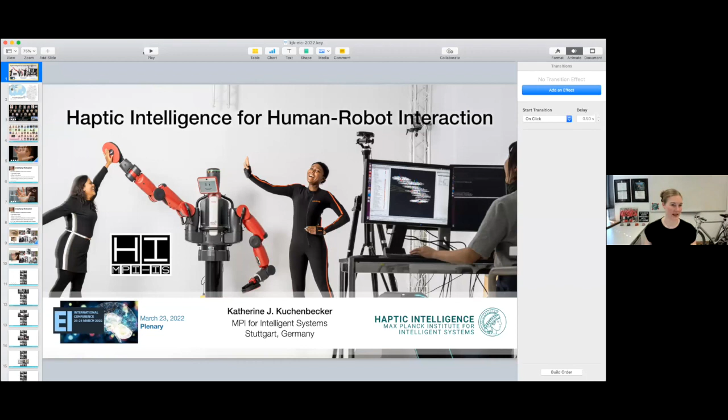Thank you so much, Josie. Let me just get my slides shared and arrange things. Can you hear me and see me and see my slides? Yes, that is perfect, that is great. Oh right, thank you very much. Just what I wanted to hear.

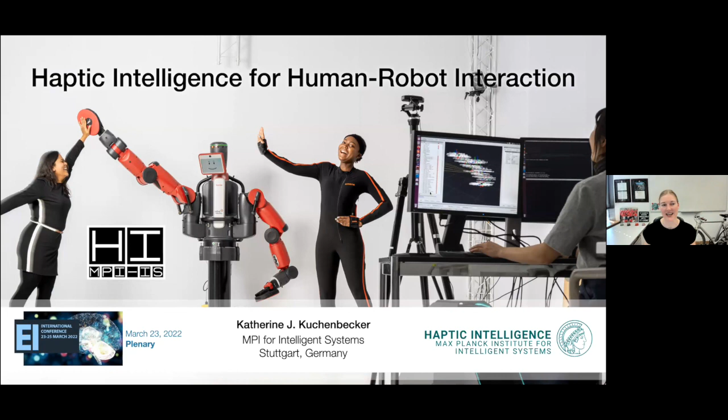Thank you so much, Josie, for that nice summary of this morning's talks. That's really thoughtful and helps us all remember what we saw. My name is Katherine Kuchenbecker. I'm a director here at the Max Planck Institute for Intelligent Systems, and it's my pleasure to give this plenary talk to tell you a bit about research that my team is doing.

I grew up, although my name sounds German, I'm actually American, and I grew up in Los Angeles. I did all my studies, all my degrees in mechanical engineering at Stanford University. And I did a brief postdoc at Johns Hopkins with tomorrow afternoon's plenary speaker, Alison Okamura. So you should definitely go to her talk and all the other plenaries. It's really a delightful set of speakers you put together.

After I did that short postdoc with Alison, I started my faculty career at Penn, at the University of Pennsylvania, as part of the GRASP Lab. I chose to go to Penn because it had this interdisciplinary spirit. It was in the engineering school between mechanical engineering, electrical engineering, computer science, and biomedical engineering. We had lots of connections to neuroscience and psychology, and they really transformed how I thought about research and what it meant to be doing interdisciplinary research in embodied intelligence, in robotics, in AI.

In January of 2017, a little more than 5 years ago, I moved across the Atlantic to the Max Planck Institute for Intelligent Systems. This is a map of Germany. We're here in the southern part of Germany. I work in Stuttgart, and we have another site in Tübingen. Our institute is quite young. We were only founded 11 years ago, and it's a big institution.

We are extremely lucky to get generous taxpayer-funded research money for research in all areas of intelligent systems, which I think overlaps very, very well with the spirit of this conference. Our institute is composed, we have directors at the top—these are like the endowed full professors who stay here for the rest of our career. We have a wonderful set of group leaders who work here for like 5 to 7 to 9 years and then go out and get a professorship somewhere else. Maybe in your field you know some of my colleagues, maybe you know Michael, Moritz, Bernhard, Christoph, or Metin, or some of our group leaders.

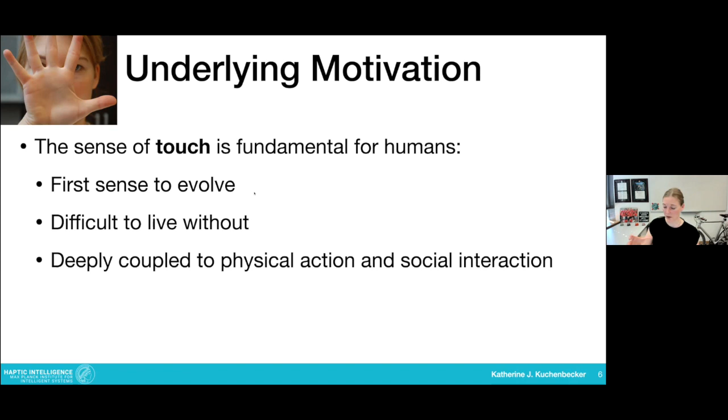So I want to reach out and pick up this glass of water. Touch is involved in how I move my body, how I come into contact with the world, how I stay safe, how I interact with other people, how I feed myself. And it's spread throughout your body. Unlike your eyes and your ears, which are very localized organs of perception, your skin is a huge organ and has many, many different channels.

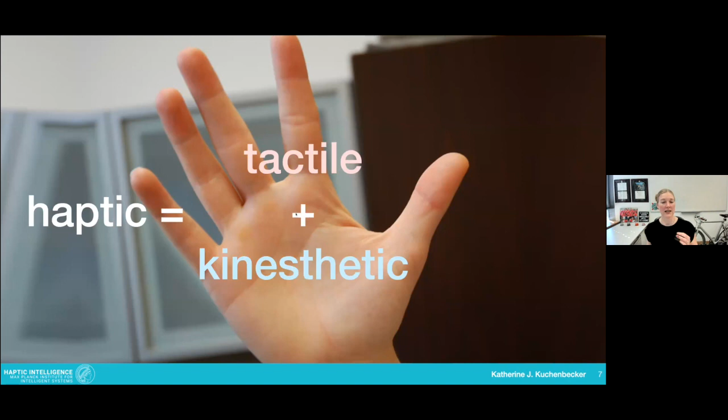So when I talk about your haptic perception capabilities, I usually split it into your tactile system and your kinesthetic system. Some people call tactile cutaneous. This is everything that's actually in your skin, wrapping all around your body at the interface between you and the rest of the world.

And the mechanoreceptors that are embedded in your skin give you the ability to sense where contact is happening, how it's pressing, is it stretching your skin, are things slipping across your skin, is something vibrating against you, is a tool that you're holding vibrating as it hits something, as it cuts, is your skin changing temperature? Is heat being added or removed from your body? And we have a little bit of proximity sensing in terms of the hair follicles on hairy skin.

It's also really important to understand that skin is not uniform. The skin all over your body is adapted to the location. The number of receptors at the tips of your fingers is higher than at the next area of your fingers, and then the other areas on your palms. That's the glabrous skin, which is also very finely tuned. And then the hairy skin has more broader receptive fields, and it's not as densely innervated.

And even among that, different regions of your body have different levels of sensitivity. So there's a lot to know, but that's probably a good start.

Your kinesthetic system, also involved in proprioception, is knowledge of how your body is moving in space. This comes from, you can feel, not consciously but subconsciously, the lengths and velocities of your muscles, the forces in your tendons and ligaments, and the angles of your joint receptors.

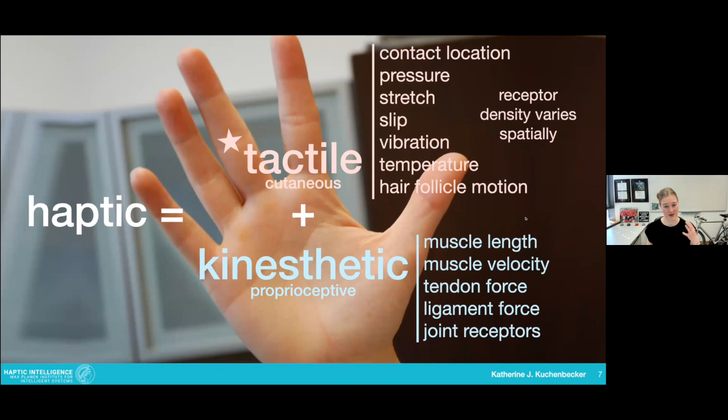And robots, like a robot we design and build, would tend to have more sensors like this, and not so much of these tactile sensors. I think tactile sensation and feedback represents a huge uncapitalized-on opportunity for robotics and general technology. This is what I'm really fascinated in, and hopefully I'll get you excited about it today through my talk.

So if the sense of touch is so important to humans, you might wonder, why then so many engineered systems that we interact with each day basically ignore the user's sense of touch, or the sense of touch of the system? What do I mean by that?

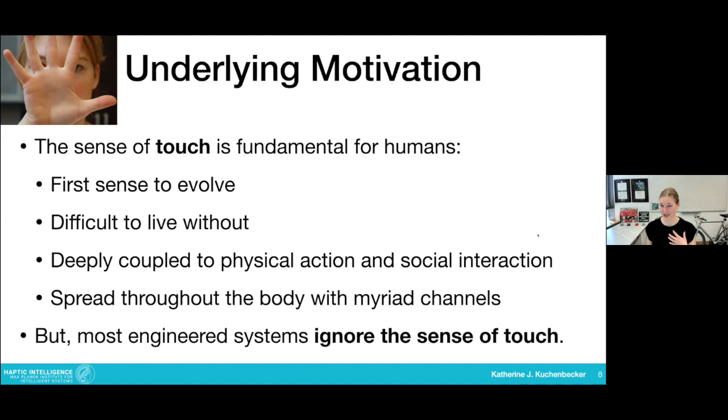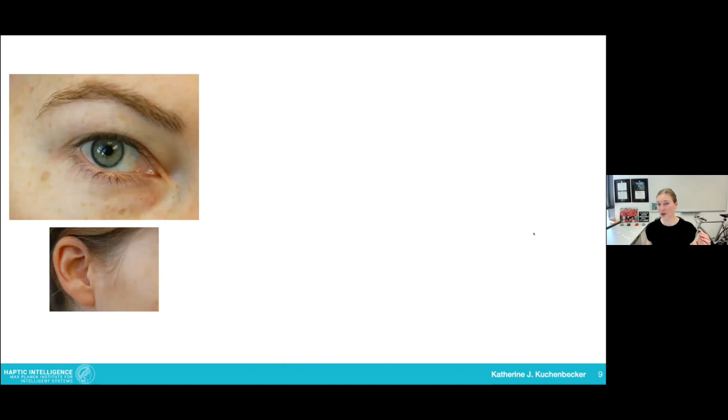I think if computers could draw a picture of what users are like, they have an eye, maybe they have two, probably just one, they see visual stimuli. You can hear things, and maybe there's a hand, or maybe it's just an index finger. My iPhone can feel when I touch it, which is good, but it never presents programmable sensations to me. I pet my cat, Toby, or feel the fabric of something I'm shopping for online, and it always just feels like glass.

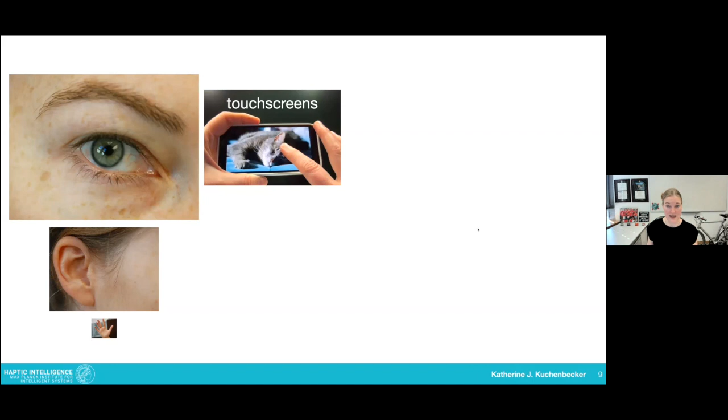We don't have digital display of haptic sensations on screens or in virtual reality. Systems can measure my motion, but they don't present sensations. So those digital virtual interactions that we can have are very different from the physical interactions we have in the world.

This also happens when people are remote controlling robots, say for robotic surgery, which is a topic I've worked on a lot. You can see very well inside the patient. These robots are being used right now around the world to operate, to remove prostates and do other minimally invasive procedures. But the surgeon cannot feel what they're touching. They can only see, and that's very different from manual interaction, from open surgery.

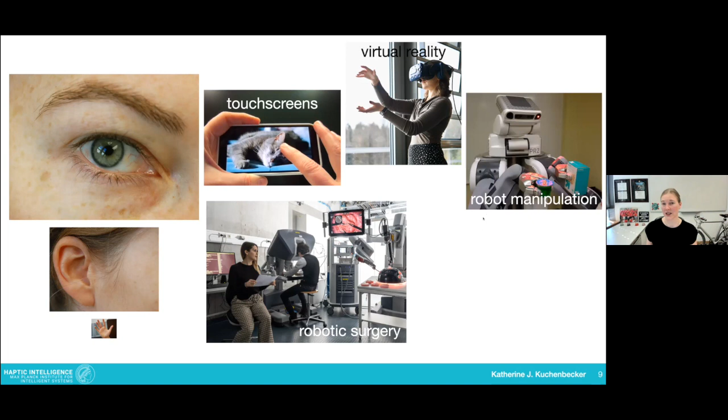And I think it's part of why this technology hasn't delivered on the promises that everyone thought, oh, it's the future, but you can't feel. You should be able to feel in the future. If we then turn to robots more as autonomous agents or semi-autonomous agents, they also lack haptic sensation. I'll talk more about this, even when, and especially when, they're there to interact with people. They're basically numb all over, no sense of touch.

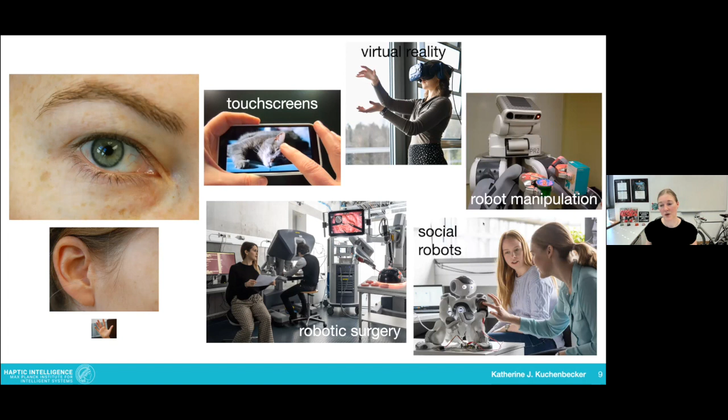People have a really hard time functioning with no sense of touch, but we give our robots almost no sense of touch. So my mission as a researcher these days, I would say it succinctly: to try to bring physical interaction and touch cues more to the forefront in all these different engineered systems, whether that's feedback for humans.

So my team, we work in 5 main fields. There are a lot of overlaps between them, but at the basic level, we're often looking at how fingertips function, what you can feel. The mechanics of soft frictional contact are fascinating. We use some of that knowledge to design and refine and characterize haptic devices, which you'll hear more about in Allison's talk, but are mechatronic systems that create sensations for people to feel, either from a virtual world or from a remote environment when you're controlling a robot.

We work a lot on this: how to add haptic feedback as a user is controlling a robot remotely, how to understand their skill learning over time, how they can train, how they can improve more quickly. Can we automatically assess their skill?

And then now turning more to where robots are an agent, we've also been doing a lot of work in physical human robot interaction. And then at the end, touch sensing, inventing new touch sensors. And it's these last two fields that I wanted to focus on, that I was asked to focus on in this talk today: touch sensing and physical human-robot interaction.

And I find there's a really virtuous cycle between these two, because if we can come up with new touch sensors—there are very few good touch sensors in the world, we need more—but if we can come up with new approaches to touch sensing, then we can create new ways for humans and robots to interact together. And also on our needs side, or maybe there's some kind of interaction we want to create, we can come back to the sensor engineers and say, we need different kinds of tactile sensors than have been invented so far or than are available. And maybe we can create something that's more like this, and that can let us do what we want.

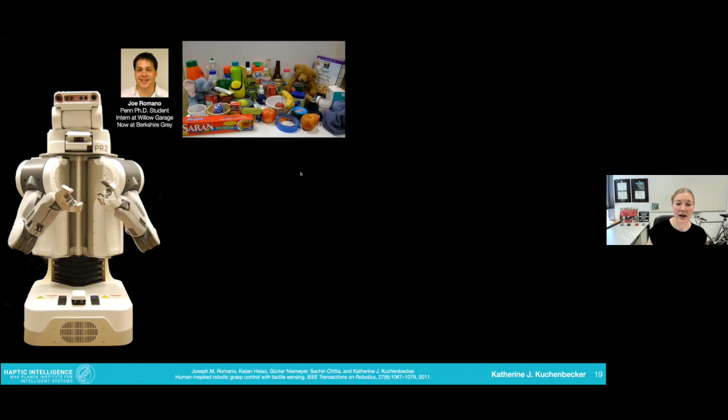And we took a lot of inspiration from neuroscience. This is a beautiful paper, probably my favorite paper, by Johansson and Flanagan, about the beautiful coordination of how the tactile receptors and fingers coordinate as you close and you feel contact, and then you lift.

And then if something bumps you, how you react, or if you're setting it down, you don't move the glass right to the surface of the table and let go. You move down till you feel the contact, and then you let go at that moment.

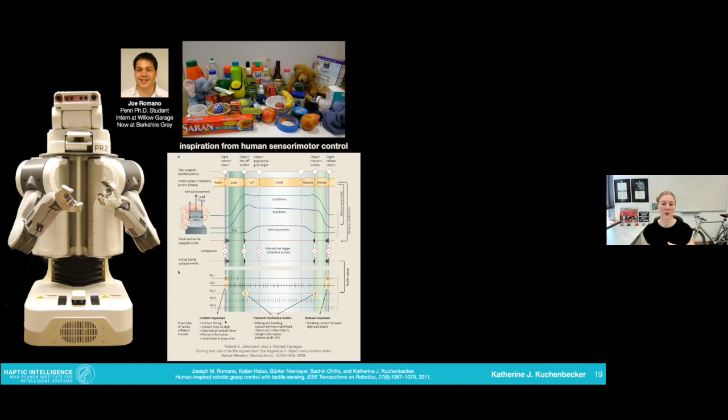And so we tried to endow the PR2 with similar kinds of event-based signals, and steady-state signals, just based on its very, very rudimentary tactile sensors, which were just a very low-res 5x3 grid of pressure cells, which were very hysteretic and low sampling rate, like 24 hertz, if I remember, plus an accelerometer. And that accelerometer was really important because it's like a shock sensor—it's a high bandwidth vibration sensor.

So that would let us feel, if I'm holding an object and I'm moving it down, you can feel a transient when the object hits the table. Or in the pressure sensors, we could look at the high pass filtered version of the pressure signal and know that something had slipped and the robot should hold on tighter. Or if we're handing the object over, something had slipped, it's time to let go.

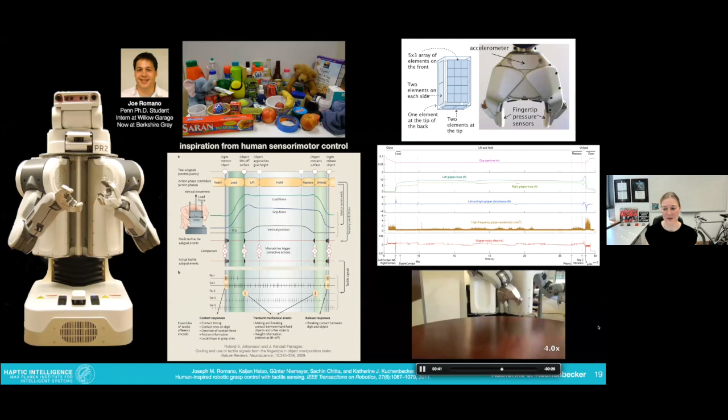And we found, even though the sensors were quite rudimentary, we could do a lot. This is a video of picking up and setting back down some objects where the robot doesn't know what they are.

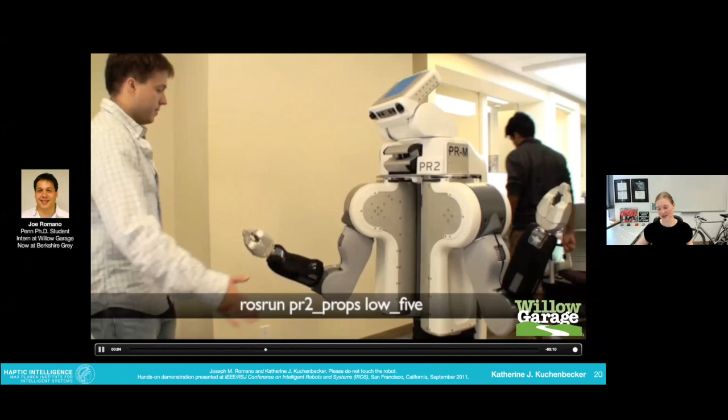We also used this capability, the accelerometer, for high fives and fist bumps, which is lots of fun, but basically the robot's just moving through a trajectory and waiting till it feels the contact. I won't talk about this more today, because today is not about accelerometers, but about tactile sensing.

So then we'd done that project with the PR2, and we wanted to do more. I was working with Trevor Darrell on a DARPA project where we had to teach the robot perceptually grounded haptic adjectives. We wanted the robot to be able to touch things and not just pick it up and set it down, but to be able to feel it and describe it in words like a person would.

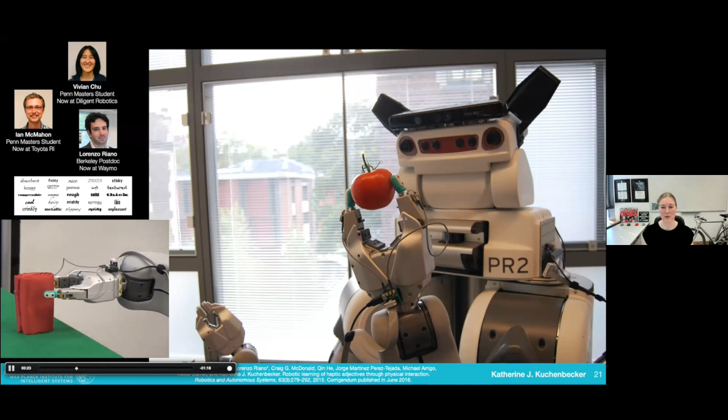So we endowed our robot with these biotacs, which were and still are amazing tactile sensors that were developed from Jerry Loeb's lab in USC for prosthetic hands, but have also been used a lot for robotics.

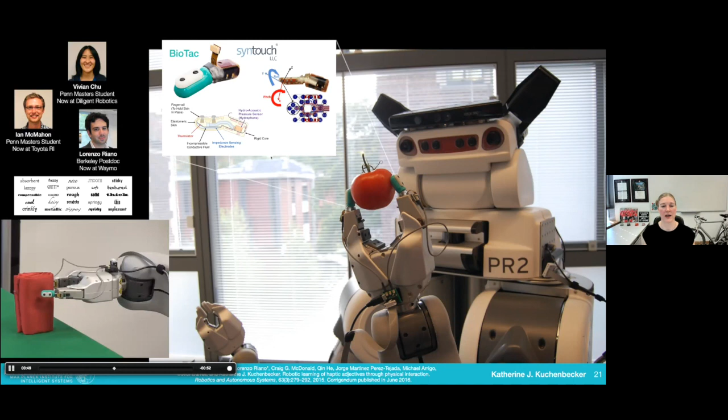They basically have a saline-filled fluid chamber surrounded by rubber and electrodes that are doing impedance measurements, spatial impedance measurements, plus a hydrophone, which is like an accelerometer, and a pressure sensor, and some temperature sensing. So we had all of a sudden multimodal tactile sensing, which was really exciting.

But unfortunately, there were some shortcomings. We used them for a ton. I love these sensors, but it's actually pretty hard to interpret these 19 electrodes. They don't have a physical interpretation. It's not really shape, it's an impedance.

And it's a compact form, but it only has a sensitive area on the outside. If you touch the robot finger on the back, it feels nothing. And they're really delicate. This ribbon cable broke so many times, and these sensors are expensive. They're like $10,000 or $15,000 each.

We broke a lot of them, and they're quite difficult to integrate into a platform. So we had to run the little boards and the wires all down the robot arm. So it was great for research, but not practical for many other applications.

And also, this approach for fingertip tactile sensing is clearly not going to work for the whole rest of the robot. So this project showed me enough that I was really fascinated by tactile sensing and what you can pull out of tactile signals, but that we need better tactile sensors for robots, and that doing that would enable robots to become more intelligent and more capable in their interactions with people.

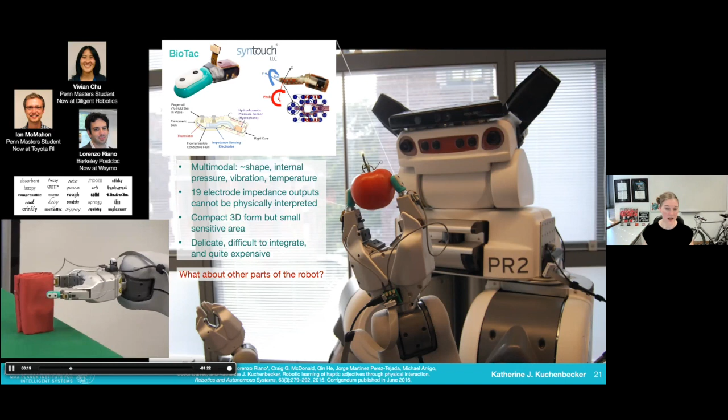So that is what I'm talking about in this touch sensing to physical human robot interaction cycle. And after all these years of working with lots of different sensors and robots and applications, I can tell you what my wish list would be for tactile sensors.

My ideal tactile sensor, first of all, it would be soft. And soft is important for cushioning contact and also for allowing a load to be transferred, torsional or frictional load. It's really hard to control rigid contact. So softness is going to be really important.

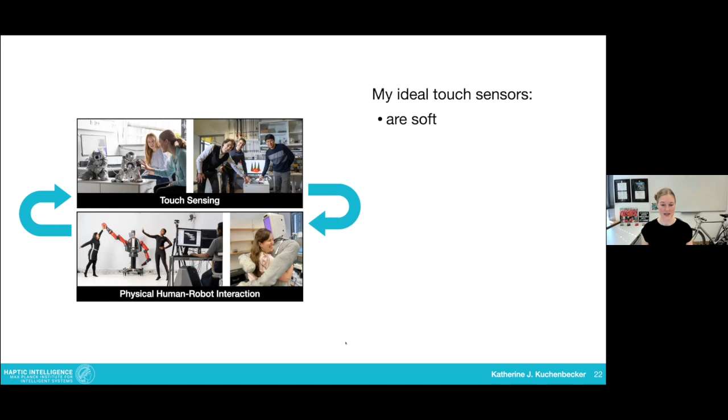I want to cover my whole robot. I don't want just tiny little pressure sensors, where something has to hit me right there, because that's never going to happen. There can't be dead zones, there can't be blind spots. The whole robot, or almost the whole robot, needs to be covered and tactile sensitive.

I need, especially, and this is often difficult, to tell the difference between no contact and contact, the start of contact, when something happens, because that means the contact state between the robot has changed. It needs to do something different. Either it's trying to form that contact or it's not, but it needs to know something new has happened.

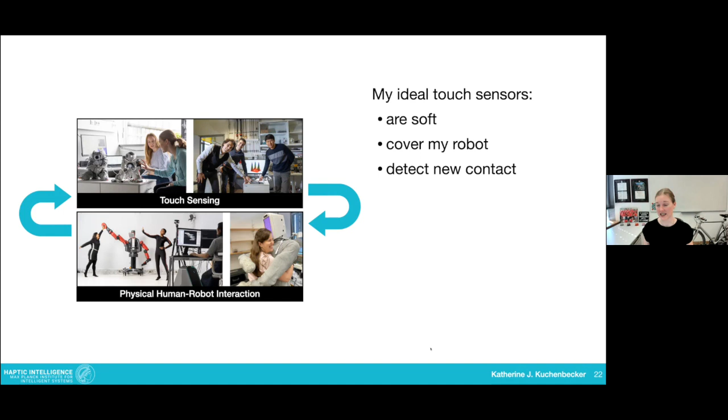So I want it to be sensitive, but I also want it to have high dynamic range. I don't want to clip those signals. I want to keep responding as the pressure gets higher and higher. So I want it to be nonlinear in its response.

I want it to be fast. Time delays are going to be no good. It has to be quick so that I can compensate for what's happening and react, whether it's a high five or something I'm crashing into or something that's falling. We need to respond quickly.

It needs to provide useful information. And this is kind of obvious, but what is useful really depends on the task, the part of the body, what you're trying to do with that robot. And I think too often we think of touch sensing as similar to our eyes.

We want a detailed, high resolution pressure sensor to press into shapes and identify what they are, and that's often not what we want. Maybe I do need that detailed pressure distribution shape, maybe I need shear, maybe I need slip, maybe I need just contact. It depends on the application, what is going to be useful, which part of the sense of touch we should be focusing on.

We absolutely need sensors that are robust and reliable. Robots are going to crash. We need a lot of repetitions, especially for learning-based methods. They're going to hit things, our sensors are going to break, they need to be pretty robust. Softness also helps there. They need to be reliable, so even if it's not going to physically break, the computational connection or the wiring has to be rock solid, and that's a very difficult engineering challenge.

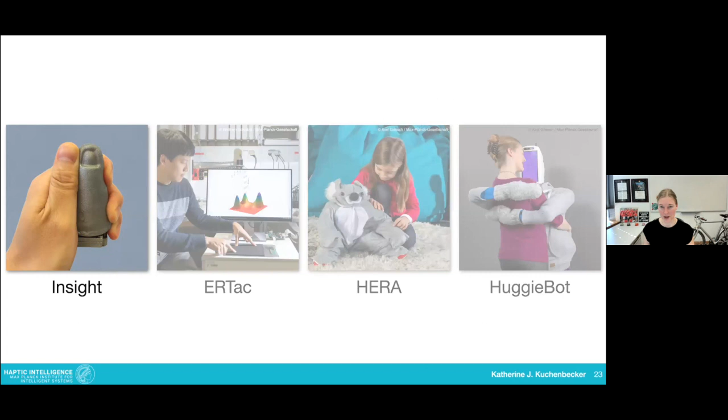So first, Insight. I'll start each project by showing the team - team is really, really important to me, and highlighting the person who's leading the project. In this case, it's Huanbo Sun, who's a PhD student with my close collaborator and friend, Georg Martius, in my institute.

Together we wrote this paper that was just published a couple of weeks ago in Nature Machine Intelligence. Georg and I also have a new PhD student, Iris, who started about a year ago and is continuing this project. Georg and Huanbo have done lots of other cool stuff on tactile sensing, so you should look at their work as well.

But I'm just going to focus today on this project we did together called Insight. Insight is a haptic sensor that is powered by vision and machine learning, and this is not biomimetic at all - we're using a camera to do touch sensing. Why? Well, there are a lot of great cameras available because of cell phones. They're cheap, they're robust, they can acquire a lot of data all together.

They're small form factor. What we do is have this camera looking inside a device that's about the size of a human thumb. It's a soft elastomer shell overmolded on a stiff skeleton, and it's lit up from the inside. It's opaque, so you see it's silver. The camera can then see the inside of this hollow shell and figure out where touch is happening - we can see the whole thing really quickly and then figure out where contact is happening.

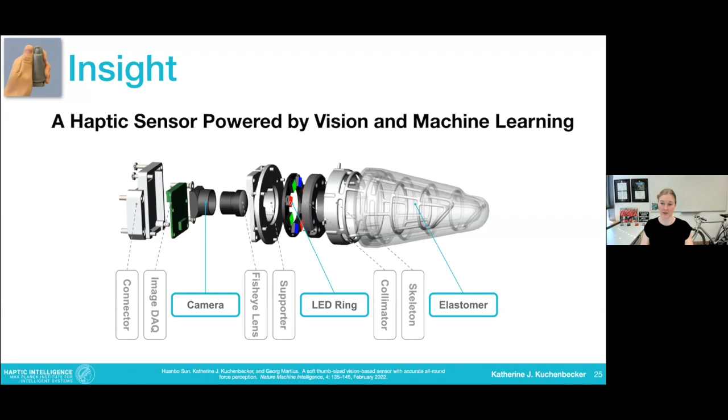And I think this is going to be really useful for manipulation and human-robot interaction. We haven't gotten to that yet - that's what Iris is working on for her PhD.

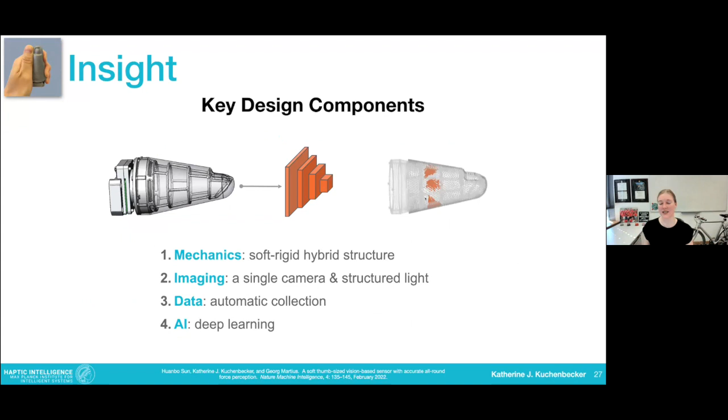I'll tell you what we think are the 4 key design components of this sensor. First, the mechanics - we need this soft elastomer skin so that it's sensitive, so little deformations cause something that can be seen by the camera, but it has to be strong. This frame can withstand 40 Newton forces from all different directions.

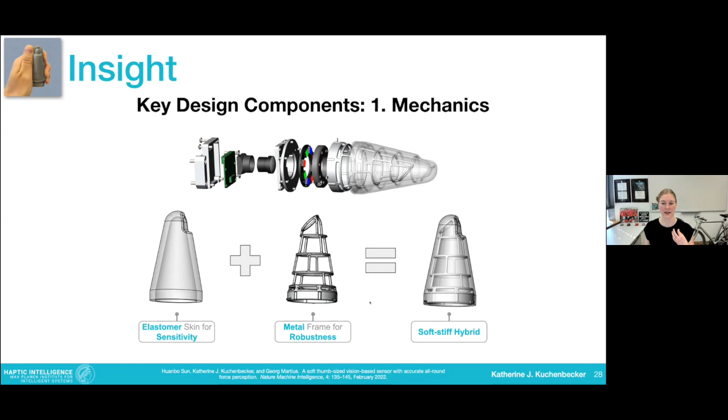So we get this nice hybrid where we get a response, but it doesn't collapse, or it can maintain structural integrity. The lighting was also more important than we imagined at the beginning. We have 8 LEDs, a collimator shapes the beams so that we illuminate the whole inside well.

We're using photometric stereo and structured light. Both of those principles allow the deformations to be visible to the camera. And then we need a big data set. This is supervised learning. We would like to get away from supervised learning in the future, but for now we have a test bed.

And then feed that into the training data. So we have to capture, it takes a few days, I think 3 or 4 days to capture all the data where it's just pushing and pushing.

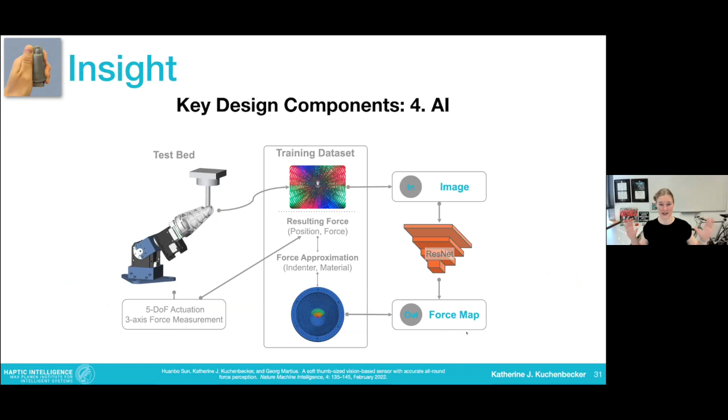And then we use deep neural networks. This is definitely more Georg's domain than mine, where we train end-to-end from these images all the way out to the force map end-to-end, and it learns: I see an image, I can tell you what the distribution of force is for what the contact is happening. And together it works really, really well.

We can see multiple contact locations. You can touch with multiple fingers at the same time and see the directions of contact, including shear, normal force. So it works really well. And we're really excited about this and want to keep building on it.

Of course, we took inspiration from lots of other camera-based force or tactile sensors, but we think this is kind of a special, different approach. We were able to achieve an overall spatial resolution of 0.4 millimeters and 0.03 newtons in force magnitude accuracy, root mean square. The forces we can detect with a direction accuracy of about 5 degrees.

And we were actually really surprised and excited to see that Insight can feel its own orientation relative to gravity, because gravity pulls the soft elastomer slightly in a different direction. And so it can even feel its own pose.

Yeah, so we're going to keep working on this and make it smaller and faster and easier to integrate with robots, and hopefully then do things with robots and people. So keep watch for more things in that direction.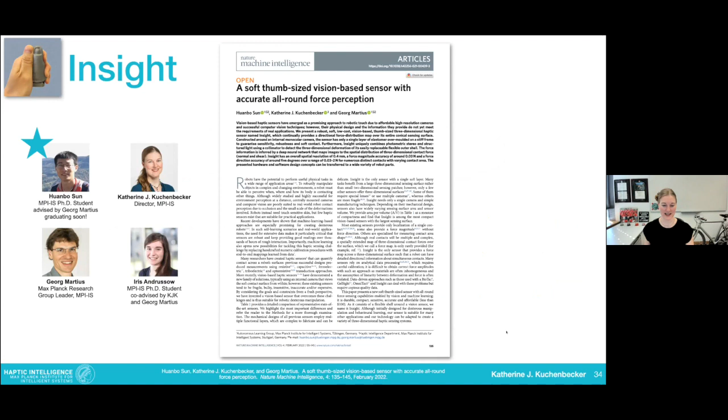So that was Insight. Next, we're going to move to ERTac, electrical resistance tomography tactile sensors. This project is led by Hyosang Lee, who used to be my postdoc and my research scientist. He's still part-time in my team, but he started in October as a group leader at the University of Stuttgart. This was a collaboration with Professor Kim at KAIST, also Georg Martius and other people from my team in Kim's lab in KAIST.

We've published many papers over the last few years. I'm going to show you just our first big journal paper on the idea, and I'll tell you at the end a little more of other things that we're doing. But we wanted to make a scalable approach, a new scalable approach to tactile sensing, not at fingertips, but maybe on forearms or other areas.

And what you might imagine is just, well, don't use a camera. It's not going to work that well for broad areas. You might think to make like little pressure cells, but the problem is that we need a lot of those, and we need a lot of wires coming back, or a lot of interconnections.

And we wanted something that was fewer electrical wires for the area that we could cover. And so we created an approach where we have a piezo-resistive material where when it locally gets deformed, the resistance changes there. And we intersperse it with electrodes that we do have wires coming back from.

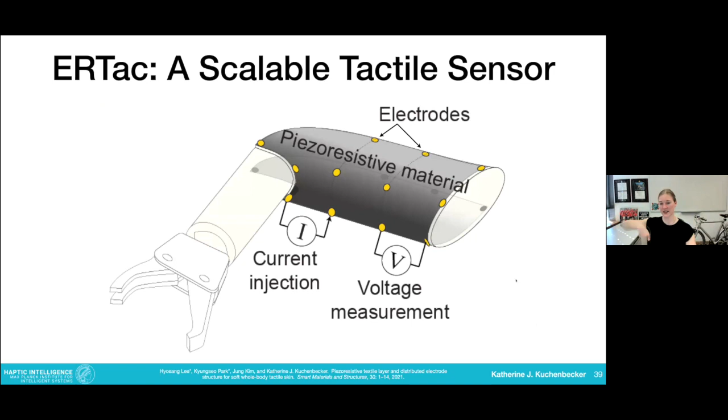And then the principle is that we can choose any pair of electrodes and we actually scan across to different pairs. Let's say we pass a current between one electrode and another, and that creates a voltage distribution. Then we measure that voltage distribution and we scan all the way across the surface, like the part of the robot's body, and we can reconstruct how the voltage was distributed.

Because the material, the skin, is piezo-resistive, we can reconstruct the distribution of pressure across the robot's skin. Inside this material are low resistance, very conductive patches on top of high resistance fabric. So when there's no contact, the contact resistance between the top conductive patches and the lower layer is high.

So the current, when we pass it through, just has to go through the high resistance fabric. But when someone pushes down in a region, like the robot bumping its arm into something or someone pressing on it, that contact resistance goes down very quickly. It's nonlinear, and locally the current can jump and flow through these patches, giving us a low resistance region.

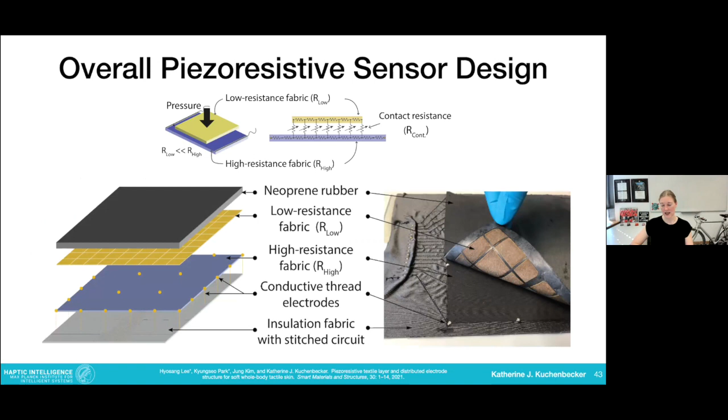And that's distributed all across. We have lots of these little patches and lots of electrodes, and all together it gives us this structure. So this is how it looks when it's fabricated. We use a laser cutter to cut the patches and adhesive to put the layers together, and we sew the circuitry with conductive thread.

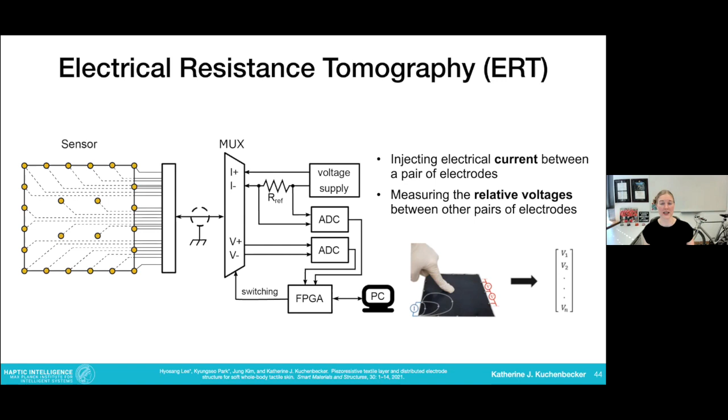We use electronics to scan through the different pairs and gather this data at a very fast frame rate, usually on an FPGA. Then we do the math in real time to do this electrical resistance tomography, basically reconstructing the resistance across the surface. This is definitely taken from medical imaging - the voltage measurements to the conductivity distribution are based on physics.

Then to calibrate from the conductivity to pressure, we do some simple measurements to get a field of how, because this depends more on the manufacturing and the materials. We've also done a lot of work figuring out what is a good scan pattern. Not any pair works - some pairs aren't very good when they're close together. They don't give you very good visibility, but choosing a more optimal scan pattern over time is also interesting.

In the end, we've been able to show that we can get very low localization errors, root mean square down to like 8 millimeters across really big areas, like 20 centimeters by 20 centimeters. Pretty good 2-point discrimination, similar to the stomach or the back of a human. And importantly, we're not just doing contact location, but also force - at every location we know the pressure, estimating how strong, so it goes up the harder you push on it.

I'll just show you the videos because that's probably the most convincing evidence. This is Hyosang pressing on different areas of our sensor, and you can see in real time the reconstruction shows where he's pushing. And he can push with more than one hand.

We did also test without the internal electrodes. The internal electrodes have a big improvement of the resolution, especially in the middle, so I'm only showing that version. You can see 2 contacts - you can't even visually see which one he's pushing on, but the sensor completely knows how hard he's pushing.

This right video just shows the impact of the calibration. So we have a constant mass. On the left, we're showing without the calibration - you can see as he moves it to different locations, it doesn't know the pressure, it's just knowing the resistance.

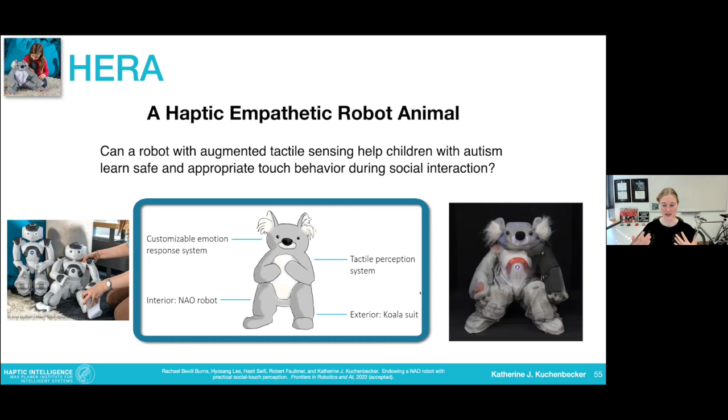A Nao robot on its own is very commonly used. They're little humanoids often used with children with autism and lots of other educational activities, but they have almost no touch sensing—just little capacitive touch sensors on their hands, head, and foot bumpers. So we've built a tactile perception system that can be installed onto Nao, which also wears a koala suit, and we're working on its emotion response system. Today I'll just talk about its tactile perception system.

We use a very simple resistive-based tactile sensor: a top electrode, low conductivity foam, and another electrode, which reduces resistance when pressure happens. We put it in a voltage divider. Here we're not doing contact location at all, so each sensor is monolithic and has just one taxel. We want to cover the robot's whole body with something practical that a therapist could use, and that will be robust. So I have a video to show, which shows a bit about how we make them.

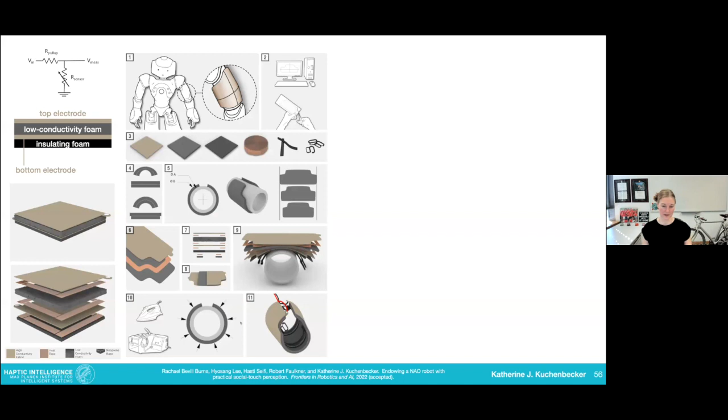Here's some photographs. It's important to note the layers we build: a bottom layer of foam, then a conductor layer, then the low conductivity foam, and then another conductor—that's the sandwich. In the beginning we made them flat, like you see here, and bent them onto the robot, and it would totally not work because that bending deforms the foam and pre-stresses the sensor. So now we've learned to make the sensors so they fit around and aren't stressed from the beginning.

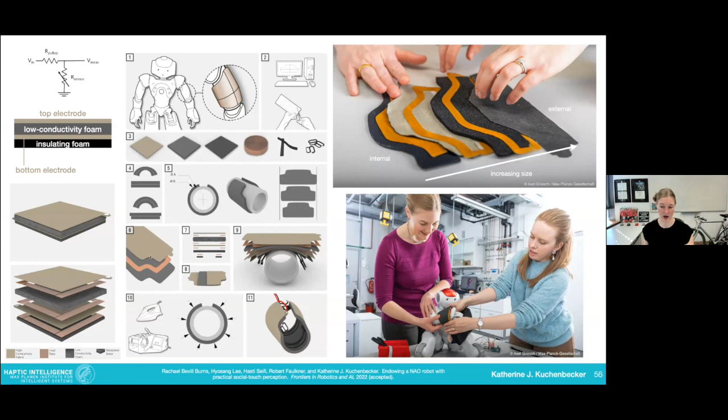I'll show you how we make these tactile sensors. With this paper, we've released all the patterns for how to make these sensors for the arm of the Nao—in the future we'll release the whole body. You assemble your materials: foam, the non-conductor...

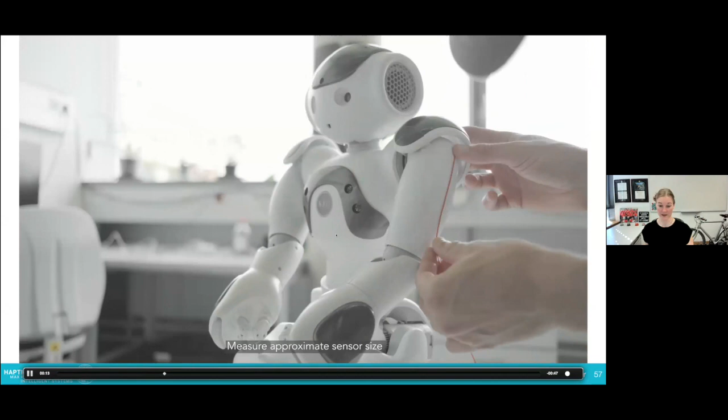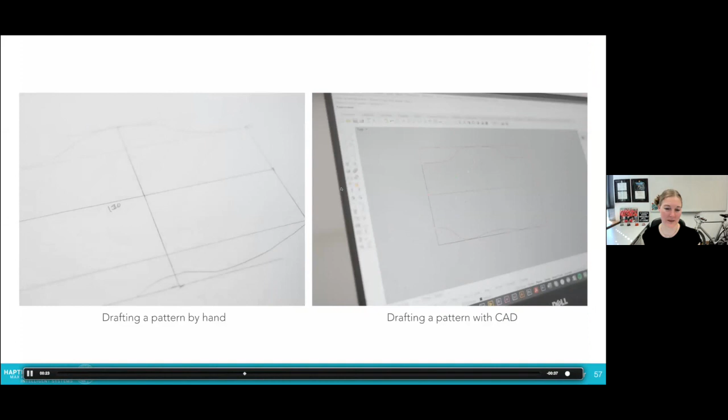Someone's unmuted—is there an issue? Sorry, I'll keep narrating my video, and if someone else could just see. Yeah, sorry about that. Thanks, no worries—at first I thought it was the video.

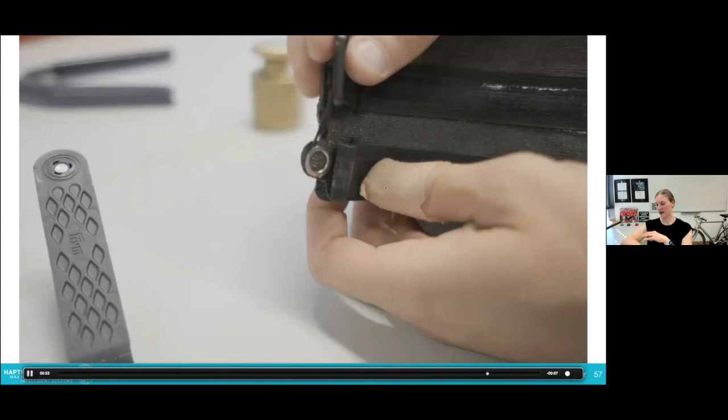So you see how we're cutting the different pieces and putting them together. It's very important that the internal layers closest to the robot's body are smaller, so that when we wrap them around the curvature of the robot's body, they all line up and aren't pre-stressed. Then we heat fuse them either with a hand iron or a mug press—this is how they put designs on coffee mugs. We get this pre-curved 3D one-taxel sensor per body segment for the Nao.

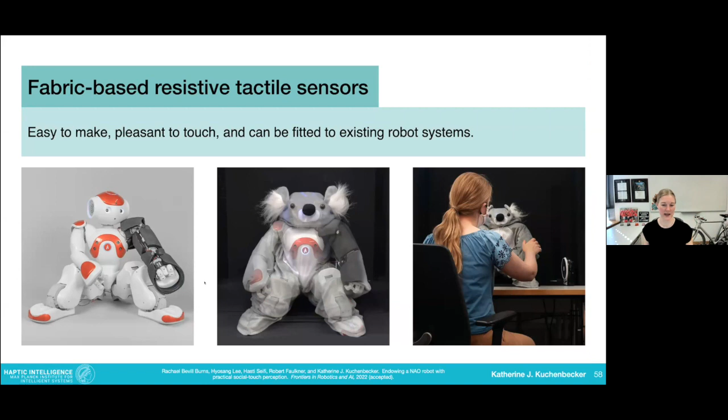Now I'll tell you a bit more about what we can do with that. So far we've made just one arm, and I'll show you how we validated that. We brought people into the lab and had them touch the robot and show different kinds of social touch gestures that the autism therapist told us would be useful. In particular, we had them demonstrate things like stroking the robot's hand energetically, or, in a moment, the participant is going to be asked to hit the robot.

People actually don't like hitting the robot, but you can watch the real-time data streaming across here. Even though we have only four measurements—the four body parts: shoulder, upper arm, lower arm, and hand—we get really nice, rich data patterns over time. That's why it's important that the sensor responds quickly, so we get this rich data stream.

We had 15 people come in and touch all four parts of the robot's body with five different gestures at two intensities, doing three repetitions each. We have this big data set that we then parsed, and did some simple machine learning on basic features using a random forest. We got very good classification rates on individual windows of data—knowing which body part is hit.

We could tell whether touches were at the gentle or energetic intensity, which hasn't been studied very much. We're very interested in intensity, and this was our first two-level version, which worked pretty well for doing the different gestures. It gets harder when you're classifying intensity and gesture at once.

A big part of this is that people don't do the same thing. You say gently stroke, and some people are gentle and some are a little more violent, and vice versa. So there's a huge variety in what people did. This was very uncontrolled data.

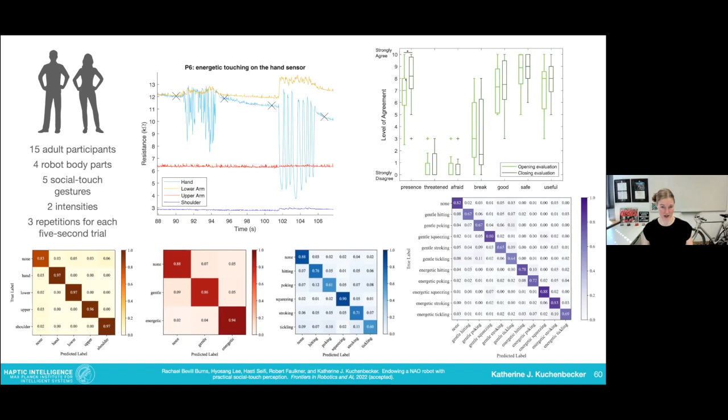So these are our results just about the tactile sensing capabilities. We're continuing to work on this project, and I'm really excited that we're going to have one now with full tactile sensing all over it, and what it can do.

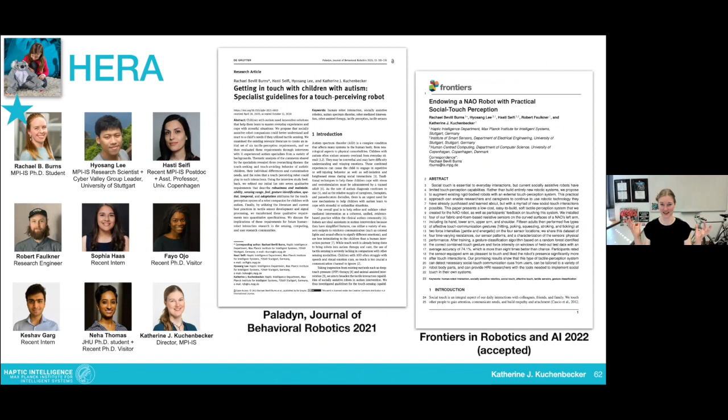Now I'll tell you about the last project I wanted to describe today, and that is HuggieBot, also a social physical human-robot interaction. This project is led by my former PhD student, Alexis Block, Dr. Alexis Block. She finished her PhD at ETH in August. She's now a postdoc at UCLA.

We just heard a couple days ago the very good news that she won the Otto Hahn Medal from the Max Planck Society. This is our thesis award. They give about 30 of them a year. I'm really proud of all the work Alexis did in her PhD on HuggieBot.

Okay, why make a hugging robot? You might be sitting there thinking this is an embodied intelligence conference and hugging sounds pretty stupid, but actually hugging is really good for humans. Hugging provides us with social support, strengthens our immune system, increases our oxytocin levels, and alleviates stress.

Before I came to work this morning, I asked my husband if I could get a big hug because he knew I was doing this talk. It has a tangible physiological improvement, social contact and hugging, deep pressure touch.

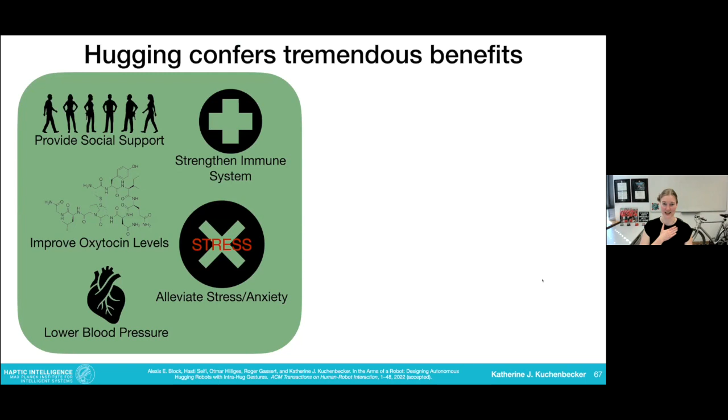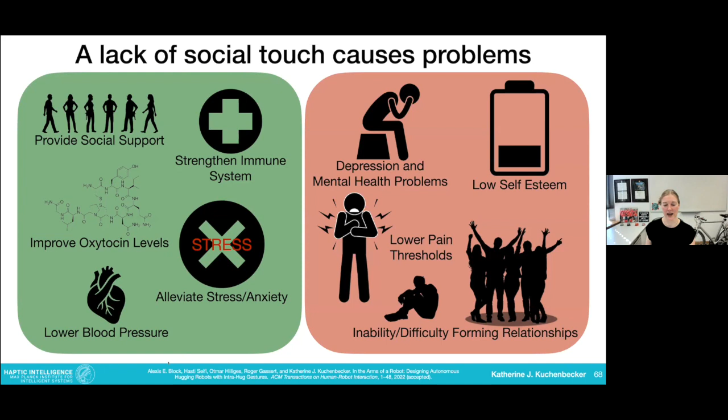And when we don't get enough hugs, which might have happened to you, like it happened to me in the pandemic, we become more at risk for depression or other mental health problems. Our pain thresholds go down, we have lower self-esteem, and we may have more trouble forming relationships, especially babies or children who don't have touch in their lives can struggle socially.

People have created hugging robots before, and there were two main categories we found in the literature. One is big, animal-like robots that sit on the ground, mostly for children, where you have to crawl over to them. And also a lot of smaller, very impressive, more pillow-sized robots. But especially these, they don't hug you back. You hug them, they're a sensor. They can feel, they might talk to you, but they don't physically hug you back. And that physical contact, that physical squeezing back, is known to be really important.

In the middle are more human-sized anthropomorphic hugging robots, and we're especially interested in autonomous robots. For her master's thesis with me, Alexis made HuggieBot 1.0, the same PR2 you already saw, in a purple furry outfit with heat. This was published in IJSR a few years ago. People liked hugging the PR2 much more than we imagined, and that convinced us to do Alexis's whole PhD on hugging robots. But this platform had a lot of shortcomings that we addressed by building a full new platform that I'll tell you about now.

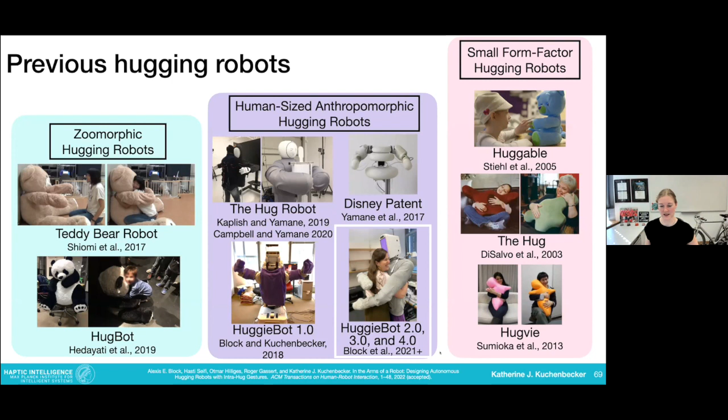Over the course of Alexis's PhD, we created 11 design guidelines, or commandments, for hugging robots that we hope can generalize to other robots beyond ours, and also generally to helping robots or robots that are going to work around people. Five of them I'll highlight in terms of HuggieBot 2.0. This was published at HRI last year, the International Conference on Human-Robot Interaction. I'll just play the video while I narrate so you can watch people hugging our robot.

So the robot has a V-shaped frame that lets you walk up close to it. It has two Kinova Jaco padded arms, a heating pad, an inflated torso, soft clothing, a screen so it can show you its face, and a camera so it can see you.

And it's really nice and huggable. It's soft and warm, human sized—the size of an adult human. And it adjusts to you: if you're bigger or smaller, you move over to the left or the right.

It's basically closing like a hand would grasp an object—like a big two-fingered grasper, but it's a hugging robot. It stops when it feels you, and when it feels that the pressure in the back has lowered because you've let go, or an increase in the torques because you're leaning back, it lets you go and you can end the hug.

People really don't like it if the robot hugs too long and doesn't let you go. You have to let the user go—we don't want to stress people out. So this was HuggieBot 2.0 from last year, and it's very fun to hug.

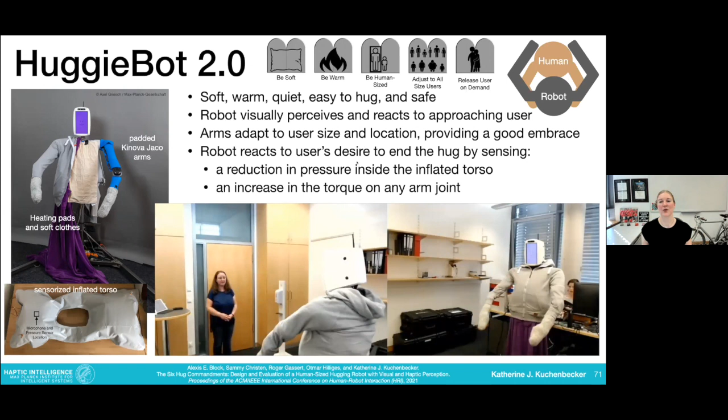There were a couple shortcomings though. One was the vision—we hadn't in the beginning estimated the user height. If you're very tall and the robot hugs you at the same height, it will be hugging you around your butt. If you're very short, it'll hug you around your neck. So taller and shorter people didn't like being hugged by the robot as much.

So obviously the robot should see you and adjust to how tall you are. It should also synchronize, like when it opens its arms and when it closes, to your approach. I'm not going to talk more about that, but those were very important to improve.

But the main thing I want to talk about is these intra-hug gestures while you're in the arms of the robot. This is from a paper in Transactions on Human-Robot Interaction. Here you can see I've taken the clothes off the robot, so you can see this inflatable—we call it HuggieChest. It's just made from a beach toy, pieces of vinyl, inflated, with a microphone and a pressure sensor inside. That's what forms the torso of the robot.

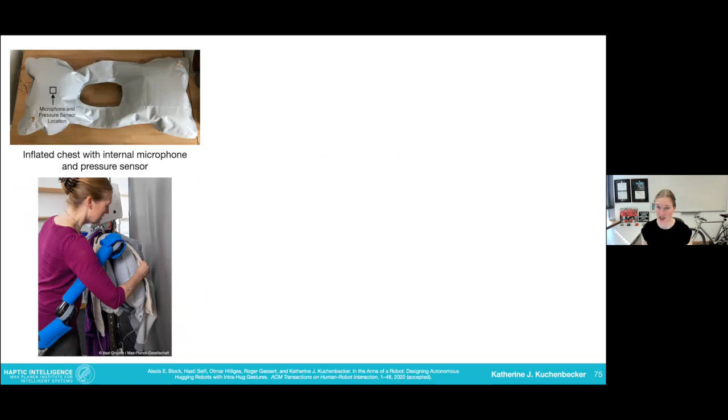We don't have distributed tactile sensing—we have a single microphone and a single pressure sensor in the back chamber. For this study, we defined four gestures: just holding the robot, squeezing it, rubbing your hand, and patting it. So sort of just pressing in, lateral motion, and impacts.

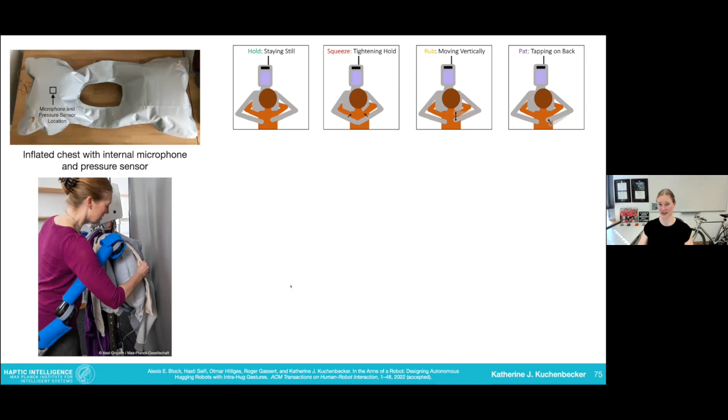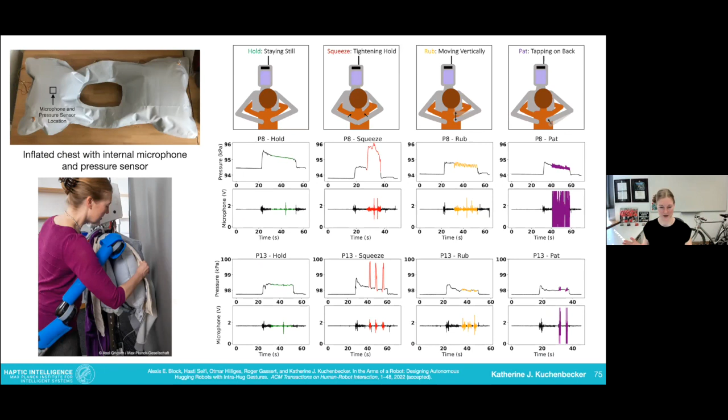Here's some sample data of different participants in a data collection study we did. You can see how the robot feels on the pressure sensor and the microphone—what it's like to be held, squeezed, rubbed, or patted. Everyone does things differently. Some people are very violent when they pat, others are much gentler. Some people squeeze over and over. They do all sorts of things, they wrestle around. So we collected a big data set.

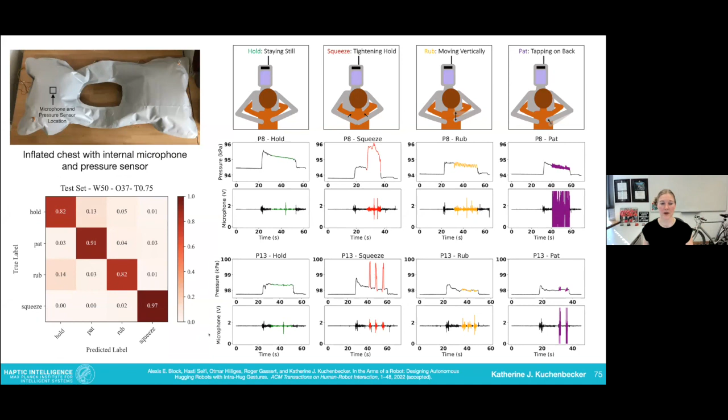We again use real-time machine learning on little windows of data to recognize what the user is doing, and can do it pretty well. Then even more interestingly, how should the robot respond? When you're in the arms of the robot and you do something, how should the robot respond? This is like the intelligence part of the robot.

First of all, people really like it when the robot responds to something, whether with a rub, pat, or squeeze—they really like that the robot does something in response to them. The only thing they don't like is when they do something and the robot does nothing—you're holding the robot, you pat it, and it stays still. Many people think this is a rude robot. Surprisingly, people really liked it when they were holding still and the robot proactively rubbed or patted or squeezed.

People especially love being squeezed. Squeezing is very comfortable—it comes back to deep touch, deep pressure touch. So people generally really liked it when the robot did stuff, but it was important that the robot feel when they do something.

We had initially hypothesized that the robot should do what the user did, but that wasn't at all what we found. Instead, people want the robot to be more creative. So we programmed a probabilistic behavior algorithm for the robot to decide based on preferences—preferentially choosing more favored responses, but not being predictable.

And now here's a participant in our study. The robot says, "Can I have a hug, please?" And he walks in.

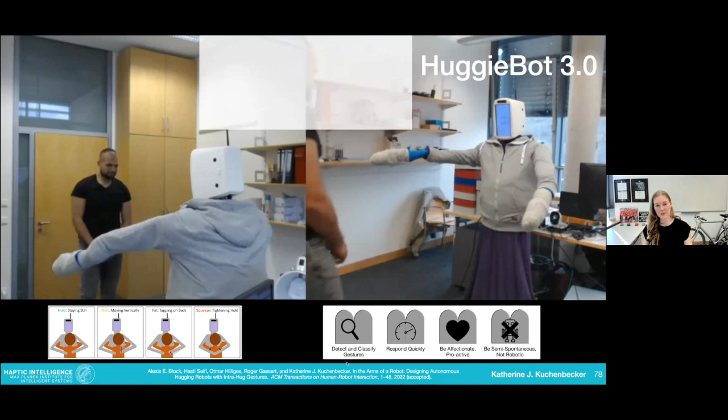It sees that he's a tall guy, and now it's closing in, collecting a baseline pressure reading. Now he's holding still, and the robot knows that. Watch this hand here. He's about to pat, and the robot feels he's patting, and responds by rubbing him.

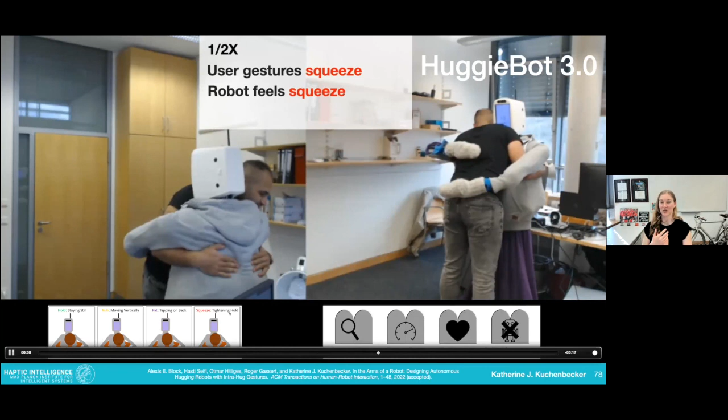Now the robot is squeezing him. Now he's squeezing it back, and the robot feels that he's squeezing. Now he's patting again, and you have this intimate interaction. I know it's hard to see, but you can sort of make out the robot hand here.

Now the robot senses he wants to let go, he's done with his hug. We tested a lot of people in these hugging interactions, and it's really actually very fun. Our robot can detect and classify these gestures and respond very quickly.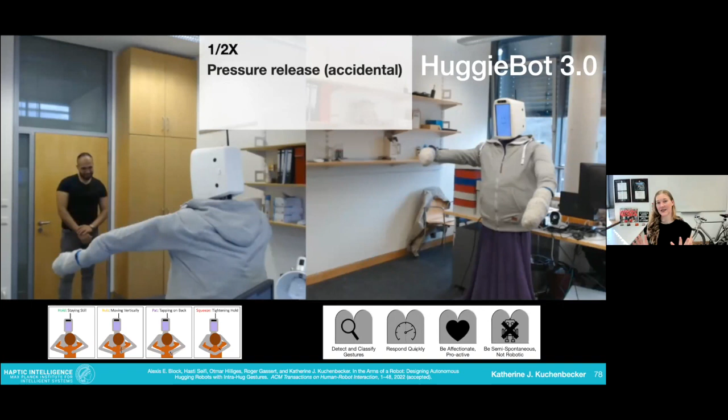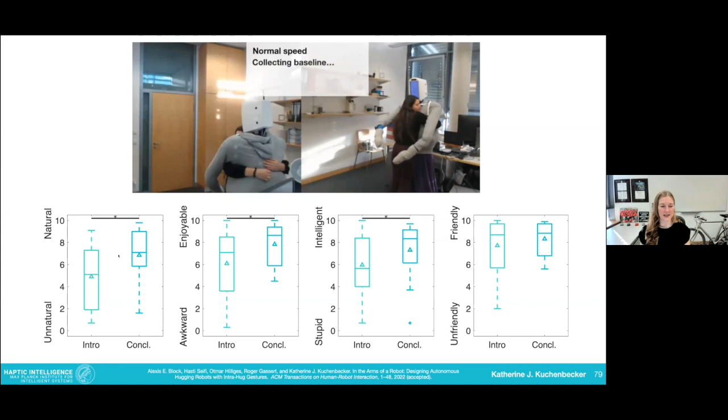It's proactive, and doesn't feel robotic. Here's another participant, and along the bottom you can see they hugged the robot a couple times at the beginning and a couple times at the end of the study. These are their impressions of how natural the robot is, how enjoyable it is to hug, how intelligent the robot seems, and how friendly. We saw significant improvements after these hugging sessions, except in friendliness, but the robot got very, very high friendly ratings at the beginning.

So overall, I wish I could let all of you hug HuggieBot. I think you would enjoy it much more than you imagine, and you would believe me more than just showing you videos of happy people hugging and squeezing and rubbing a robot. But we think this could actually provide a benefit to people, not to replace human hugs, but to supplement them for times when a human hug isn't available.

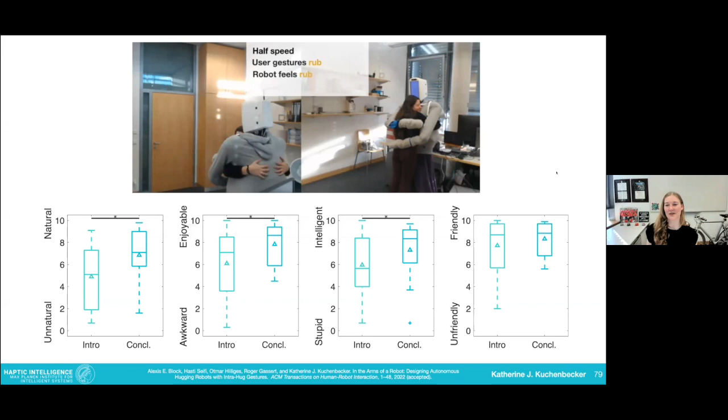So that is HuggieBot. If you want to learn more, this paper's on arXiv. It's not yet on the THRI website, but you can find it on arXiv, and there will be more in the future. There's one more chapter of Alexis's thesis that we haven't published yet. So that's the fourth project, HuggieBot.

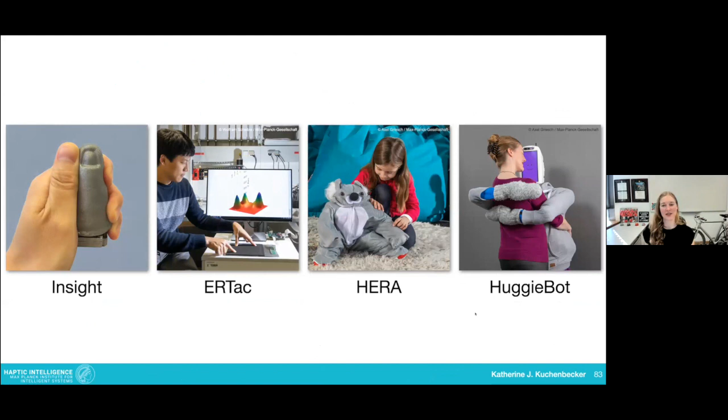I know it was a whirlwind, but those were the main things I wanted to tell you. Hopefully I've given some credibility to the hopes I wanted touch sensors to have. These are some directions we're going. Maybe a few overarching ideas you might have taken out: I think the sense of touch is important for robots and for people. I don't think it gets enough attention. It's multimodal, it has many different channels, and we don't understand it very well yet.

Robots need to have broad spatial sensitivity and high temporal bandwidth in their sense of touch. It doesn't work just to have one little touch sensor in one place. We can use individual sensors with high bandwidth or broad receptive fields to instrument large robot parts. I think this hasn't been tested very much, and I think it has a lot of promise. And any algorithm we're running has to work in real time, so the robot can respond very quickly to whatever the human or object has done.